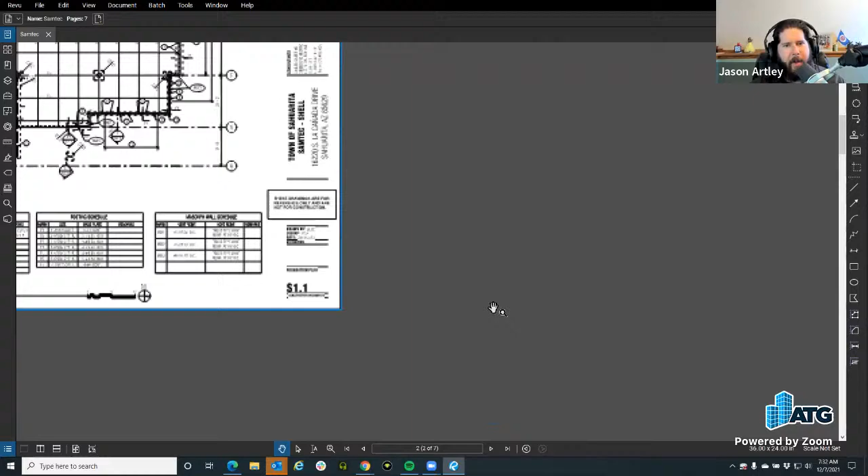But today we brought up stamps because it always comes up. It's one of those topics that you overlook because it seems simple, but it's really not. There's so many different things going on that we can really harness the power of stamps. And I've gone down the YouTube rabbit hole and watched some of those videos out there, and it's like, okay, that's cool, but why? And that's neat, but okay, cool. And then that one, okay, but what else can we do with it? And that's what we're here to explore today.

Yeah, dynamics. There are some that you can add JavaScripting to. So if you're well-versed in JavaScripting, you're going to create form buttons for things, like checkboxes. They have some out of the box that I will throw a link up there soon that we can get access to.

But let's just talk about stamps overall. Most commonly one for some of us folks—my background is structural design and a little architectural design, and Jason's is civil. So for us, maybe something that's approved, and those are out of the box here. So in Revu, under the menu bar at the top, you have tools, and from tools, you then have stamps. Now, stamps can be saved as a markup in the tool chest as well, or you can come to the stamps area over here. Now, my stamps is a larger folder set.

These will always live here, unless if you go down to the bottom, which mine is long, you can go to change stamp folder. So these are all of your stamps that are saved in your stamp folder. They are seen as a .pdf extension. That's how Revu sees them. And I will go through and just place my standard approved one.

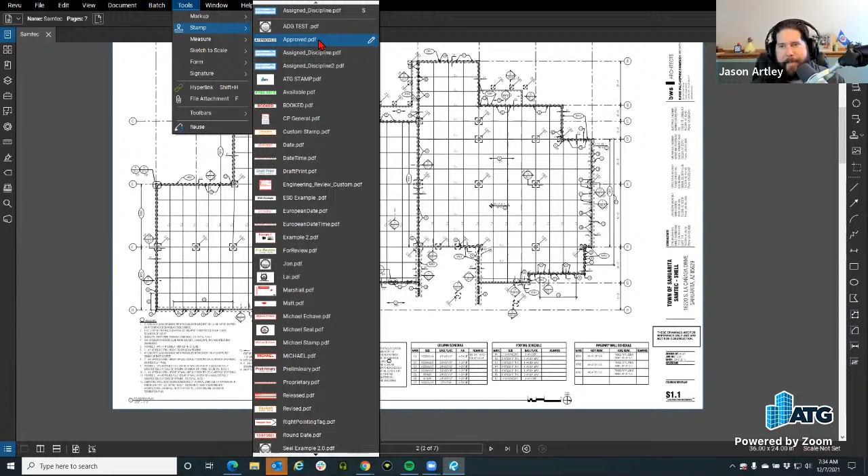And actually, you know what? Probably today we can mess around with the different blend modes so that we can be more well-informed, because myself and I think Jason, we've always asked these questions, what they do in terms of their blend mode when we're going to create them. So when you're getting ready to place a stamp, you can do one of two things.

You can either left click and hold and drag it for the size of the stamp, meaning you're scaling it up to whatever size you want it to be. Or if you just left click and place it—so if I go back to that same stamp, hit approve, left click and just select an area, it's going to place it at its scale that you originally created it at. Now that trick is underutilized, because what happens when you create a stamp, it's going to ask you for the dimensions.

So why would you want to scale it in every time? That single left click is one of the things that I forget all the time, but that's the trick to get it to show up at the proper size to fit on a title block or whatever else you're doing.

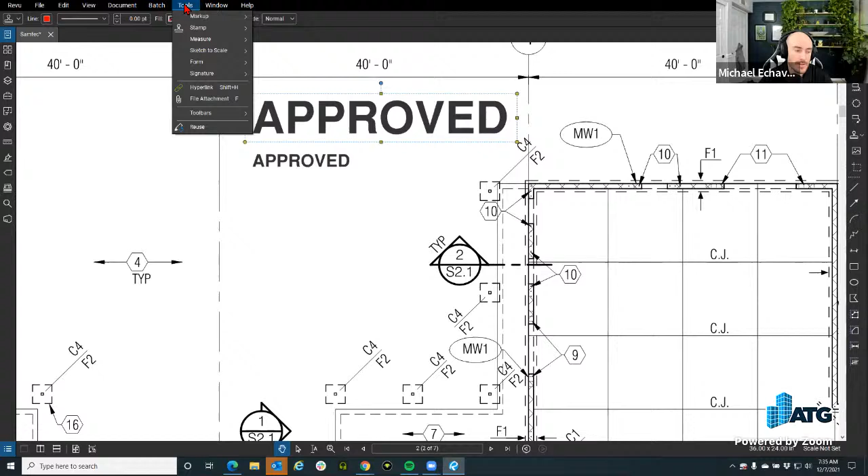The usual workflow for folks that are engineers or architects with a license to seal documents is creating a stamp as your seal with no signature on it. We all know you're required to have a specific size for those stamps, the seal. So if the seal has a specific size, you don't want to have to scale it up — it should be to scale when you're placing it on whatever document you have.

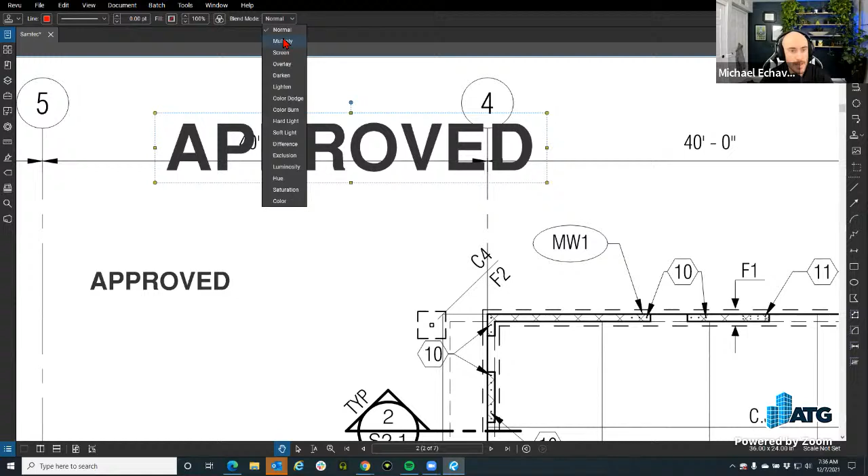Going back to here, when we are adding these, let's talk about the different blend modes. So currently right now, if I place it, it's going to be on top of whatever it's on, right? Now let's check the different ones they have available. These will ring true when we go through and create a custom stamp, because right now we're just checking the differences of the blend mode, so I don't have to recreate however many there are here to see the difference.

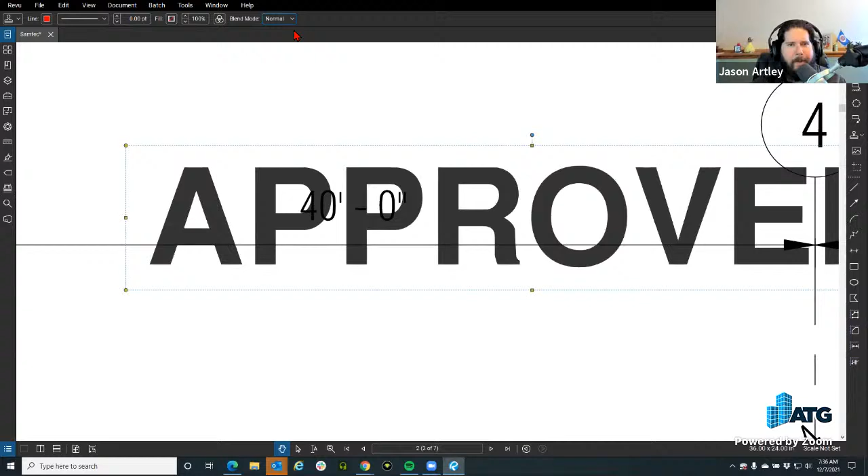So there's multiply — that looks like it's a screen almost, right? It does, but multiply seems like a weird one, let's go back to normal. Maybe we're just going to toggle between normal and... yeah, look at that, it's almost like the screen. Oh no, see, screen gets rid of it. Yeah, oh okay, well maybe that's for...

Oh no, because screen is still light. Yeah, kind of like Matt said in the chat — thanks, Matt. It sent it to the back.

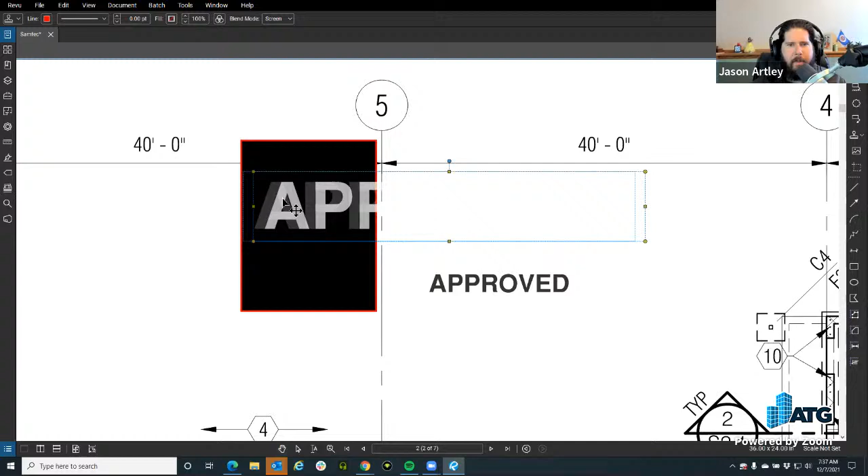So can you bring that forward? So if you go find that one again — hold on. Oh, look at you being sneaky. Yeah, see, even with the black, it is. So bring order, bring to front. Okay, so it does send it to the back, but it also screens it.

Why would it do that? Or why would you want this — that would be the question too. Why would you want it screened? Because that makes a pretty good watermark. So it would be a watermark on your text item for whatever you're placing this onto. Yeah, okay, that would make sense.

What about overlay? What is that doing? It's to the front too.

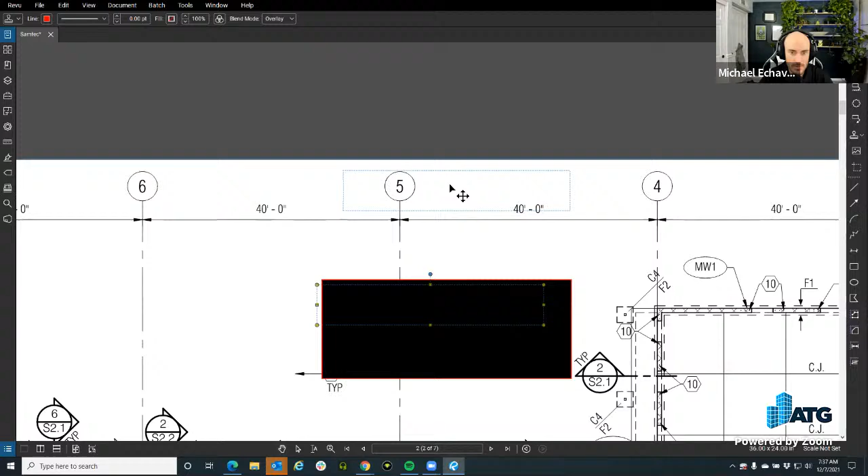Okay, so it is on top of, or it looks like it is. I thought I saw — yeah, you can see it kind of ghosting there. Yeah, see? That's really odd. And that's what's kind of fun about exploring what some of these blend modes mean, because sometimes it's like, oh yeah, just leave it on normal, it's good. But what do all these things mean? And they're not logical, right? As we've seen already. Okay.

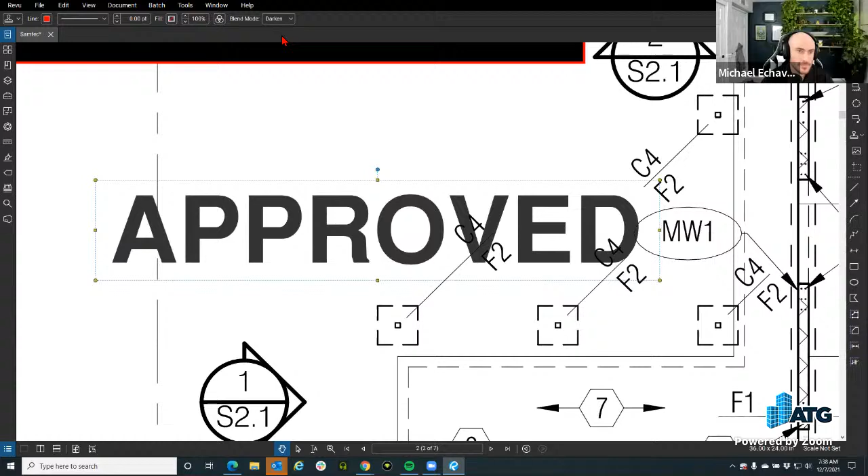Next one is going to be Darken. So still, nope, the text is still shining through from whatever it is. So yeah, but it will not be transparent — it's lighter than it originally was though. Yep, which is interesting, which is opposite than Darken, because I thought it would be. So what does Lighten do?

Okay, maybe it has to do with the screen. Let's place a couple — yeah, try one that's got color to it, like that booked one you've got, because maybe the color has to do with it.

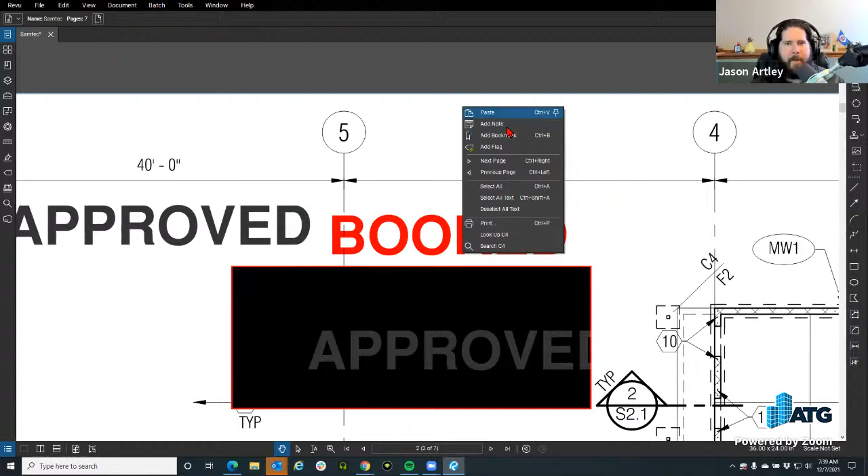There you go, David would like to see — make a copy, so do one normal and then one not normal, or whatever. So this is normal, there we go. And this is Darken. But when this goes on top of something, so normal and normal, right? And we'll just play with these different colors. So this one was Lighten, letting it bleed through. This one was Darken, and then Lighten.

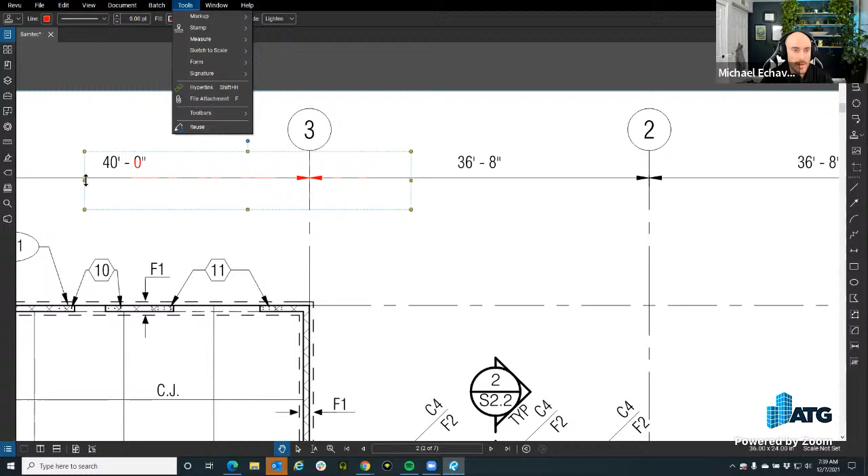Whoa, this is what I was trying to find. So a client sent me this the other day, but it wasn't clickable like that. So ironically, I haven't had time to find the solution out yet. Somebody sent me something where they were able to click around an item and it changed the background color of the line work to a different color. And I haven't been able to find the solution yet, but maybe we have here.

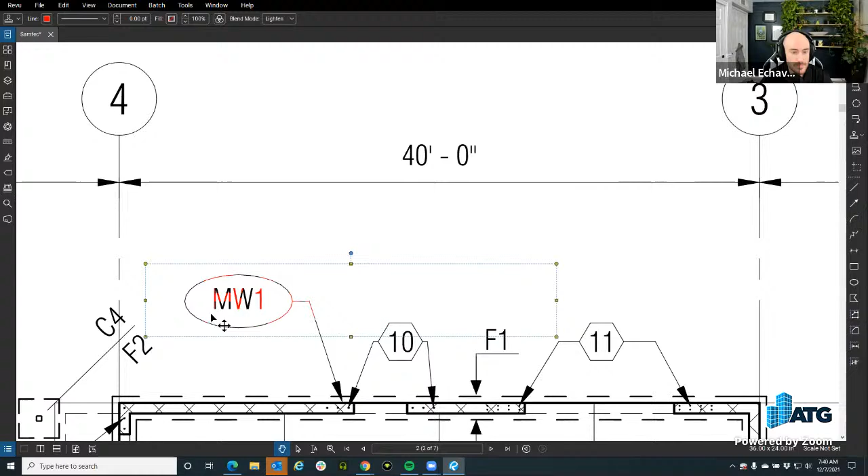So this is the Lighten mode, where it's still having the context, but it's overriding the color of the actual lines in the document. So when you had the black approved stamp, it wasn't quite as visible because it was black.

So interesting, let's go back because Darken — nope. Overlay — nope. Screen — screen does the same.

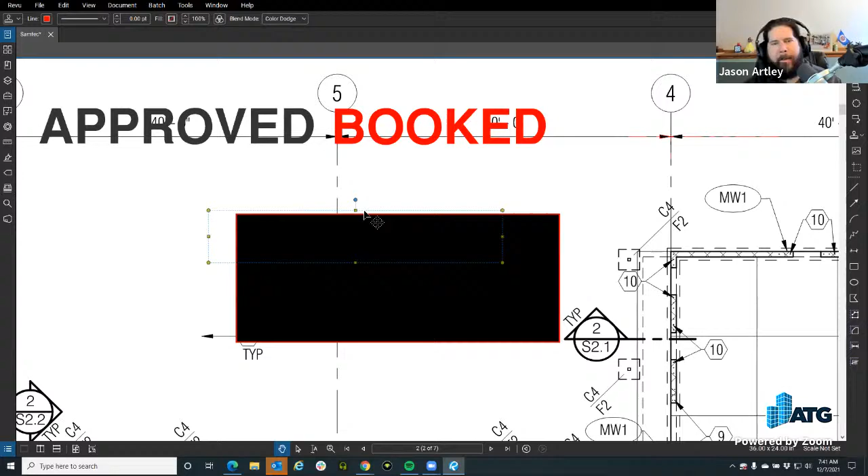Okay, so color dodge. I've owned a couple Dodges, the different colors. Wait, that's a different topic. Okay, cars. Yeah, let's see. So color dodge almost does the same thing, kind of. Not really. Okay, next one, color burn.

Dodge and burn, those are tools I've used in Photoshop, and they're a little bit more apparent. I'm surprised by all these different blend modes. It almost looks like it's sharpening that line too. So let's see. No, okay.

Hard light. So you can't see it over something that's darker. It's almost the same, right, as the original. Yeah, it's pretty hard to tell. So, like, except for this one. Yeah.

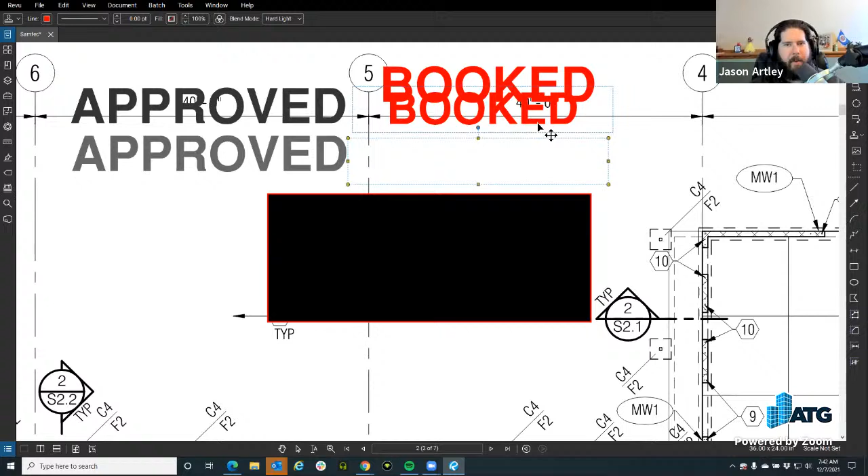I'd be curious if you were to print any of these. Obviously we want to use Revu to avoid paper as much as we can, but I wonder if it would be that visible. Here's soft light. Yeah, hard to tell.

Then again, I'm overdue for an eye exam. So there's a difference, that too. I'm blind, so yeah, difference.

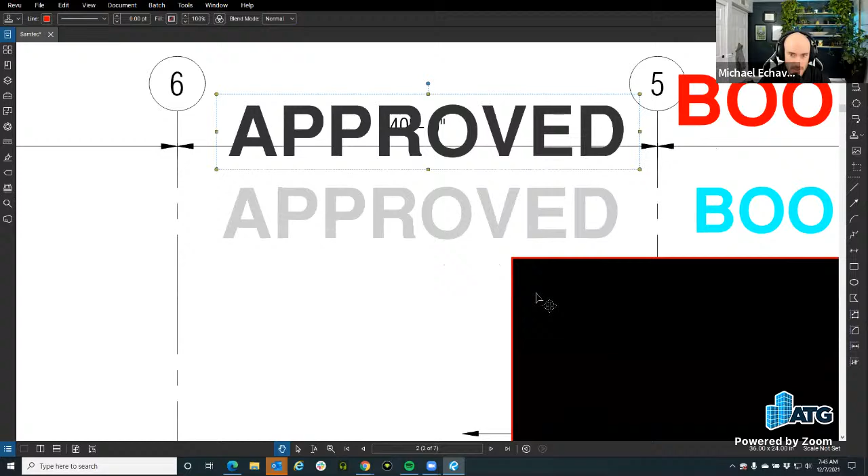Oh, whoa, so it's inverting. Oh, is that what it's doing? So if you take your black approved and do difference, it'll turn it to white. Yeah, it's like because this wasn't black. The black from out, this is black, okay. Right? So it's like it's an RGB value probably. Yeah, okay.

Exclusion, didn't change it. No difference. So, like, there's got to be a reason for it, and it's just kind of silly.

So luminosity here. Changed it to black. Was that because maybe it was normal and then I did that? Nope, still the same. Hue.

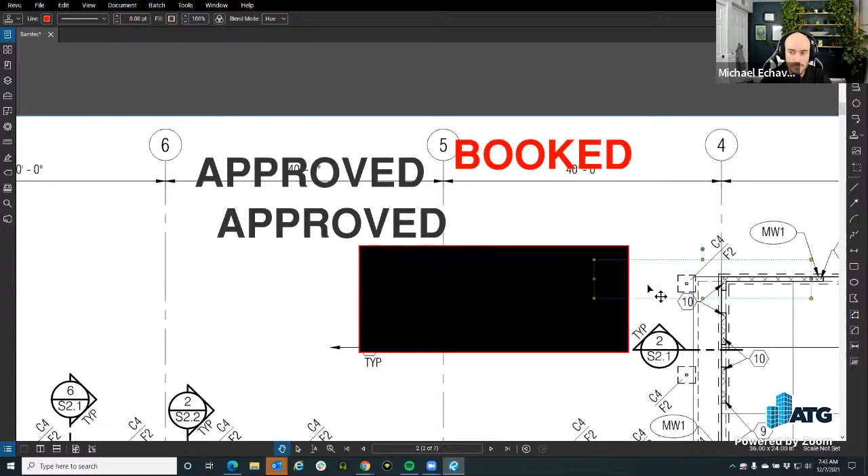You got to be kidding me. I used to know somebody with the last name Huey. Before you were born, there was a band called Huey Lewis and the News. They had a couple good songs.

Saturation is the same thing as that overriding of that line. Oh man, where did I put the other one? Okay, it's right here.

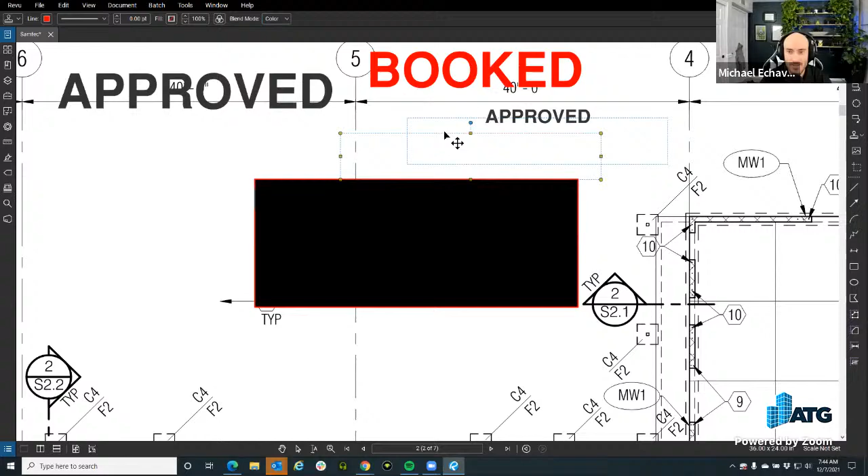And last one, color. I don't see a color. But it's doing the same thing. Oh, yeah, look at that. Oh, not really, but over the other stamps, it is. Yeah, that's really odd. So there's got to be a reason they included all of these things.

All these modes are a bit overkill for a PDF file, honestly. But maybe some of these tricks would have been good for our little turkey showdown, do a little highlight type of thing, but I'm definitely going to be using this.

Do these blend modes only exist in stamps? Have you seen them anywhere else? I don't think I've seen them anywhere else. No, not yet.

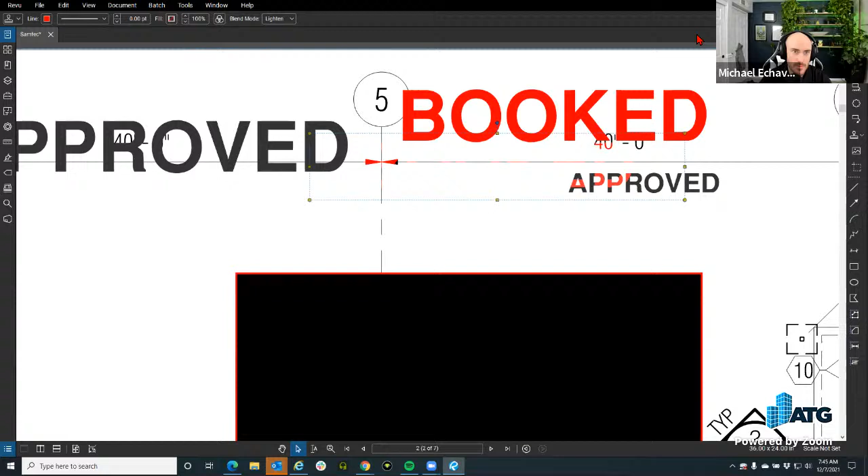So yeah, if we go to stamps and we get ready to create a stamp, if we don't like the ones out of the box, you can always edit any ones you've created before. So if you just click the little pencil here, it will show you the way to edit it. And I accidentally clicked way down there. But be careful with this.

So, couple of reasons. If you change your stamp folder at the bottom, like Michael showed, and it's right there, if you change your stamp folder to a company location, like a server location or anything like that, it will pull up all of the PDF files it finds in that folder and use them as stamps, which is great for making company standards. But if you start using that pencil icon, you're actually changing what's saved on the server, so be careful where you are.

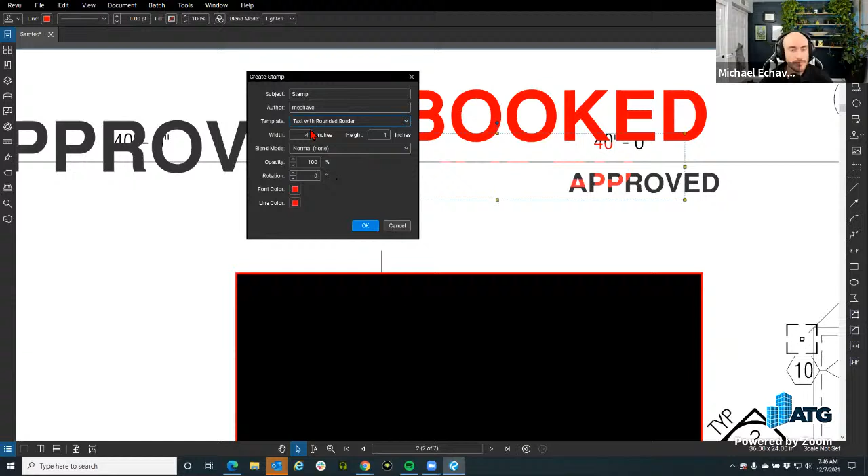You can always change the size if you wanted to. But like Jason was saying earlier, if you don't want to scale it, you just want to left click and place it. What is it going to do and how is that going to work? It'll be the actual size of what that markup is. And we just covered all of these blend modes, and that's why we did it up here.

So I don't have to click it and create all of these different ones and what they're going to be doing for those. What's the opacity of it? Rotation, font color, and our line color. I'm not going to do typical. There we go. So now here's our stamp. We have our round border, like it said, with text. And we selected the black text.

Now, if we want to have any dynamic fields where things are going to auto input some data, you're going to use the text box. And when you get ready to place your text box, you will have dynamic populate underneath. This is where fields will be automatically populated, like user, the day, the hour, the seconds. So once that stamp is placed, all of this will autofill. That dynamic text functionality is only available in a stamp, correct? Correct. Yep. There's no other way to do this.

So if you're looking for one of those ways to include that information. Hold on. There are some headers and footers that have that. That's true. Remember? Yeah. That's true. But what we see normally, like from CAD users, is they've done like a diesel string in to have their file path, for example. Yep. You can do the same thing here with Revu. Yes. But it's a name of the PDF. So just remember that in your extension of file. Without the extension, you just use this one.

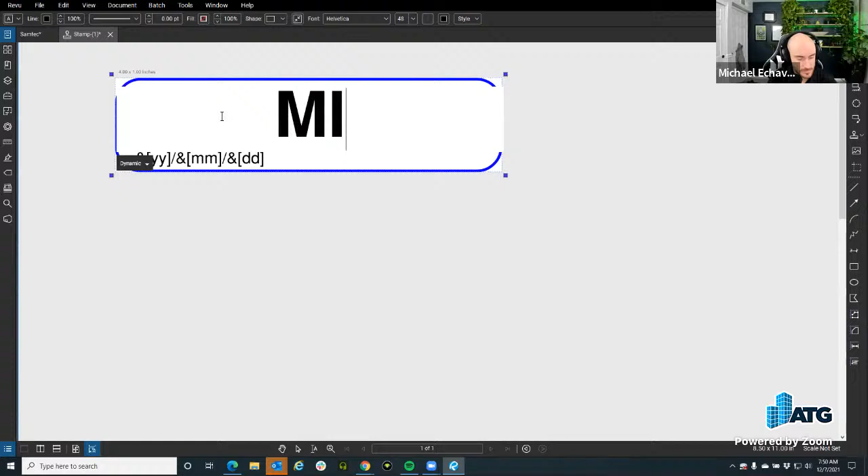So yes. The question is, can you type in that code without having to enter in from dynamic? If you put ampersand, bracket, whatever. I haven't tried it. You could probably try it and it may work. For what those are, because that's just like the JavaScript code that you're going to be utilizing.

What happens when it exceeds the box? It doesn't because, well, I guess it would be for the extension, like your file extension would probably be the only one, because these are set because it's 2 digits as it's shown here. Username or path would probably extend the box. Yeah, it would return. So anything that does exceed past, it returns, usually is what happens. Good question.

And then you can do save as. Ooh, mine's stamp 1 because anyways, so out of the box, you have it stored. Can everybody see this file path here? The program data, Bluebeam Software. For some reason, sometimes you can't see this in a Zoom meeting. But anyways, from here, you can go to C. This is where it's natively saved. So it's under your user ID, documents, Bluebeam Revu. It's C drive, program data, Bluebeam Software, Bluebeam Revu, 20, stamps. So the edition of what it is.

And actually, ironically, I've been getting folks asking questions about 21 lately. When's 21 coming out? So let me rehash that. When is Revu 21 coming out? It's not 2021. So be aware of that. Revu is no longer year locked. They made that announcement in the edition of Revu 20. So it's Revu 21.

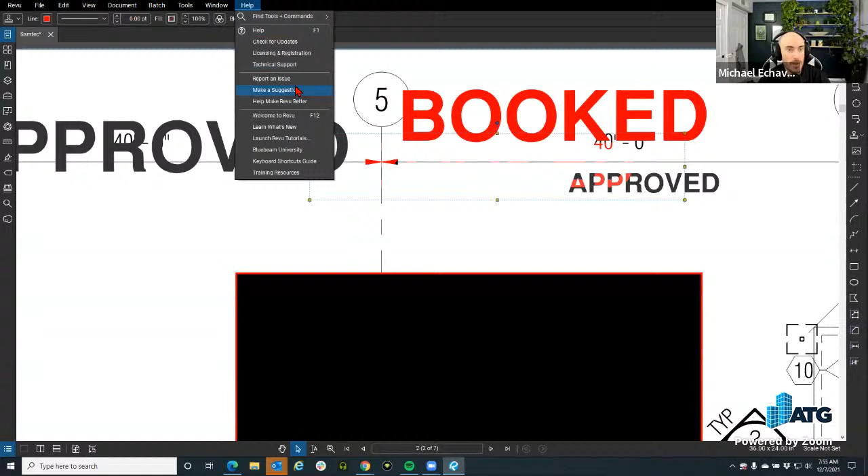I'm just going to hit the exits because now I can go to tools, stamps, and I will be able to, I wish, so maybe that is one of those. If you ever want a wishful thinking item, you can go to help and make a suggestion. My thing here would be, I have so many stamps. Can I just scroll wheel down instead of having to go down and hit this button? I don't know that I have that many stamps that I've ever had to do the scroll wheel. Yeah, I don't have that many. Interesting. I just do a lot of demos and people ask about making custom stamps.

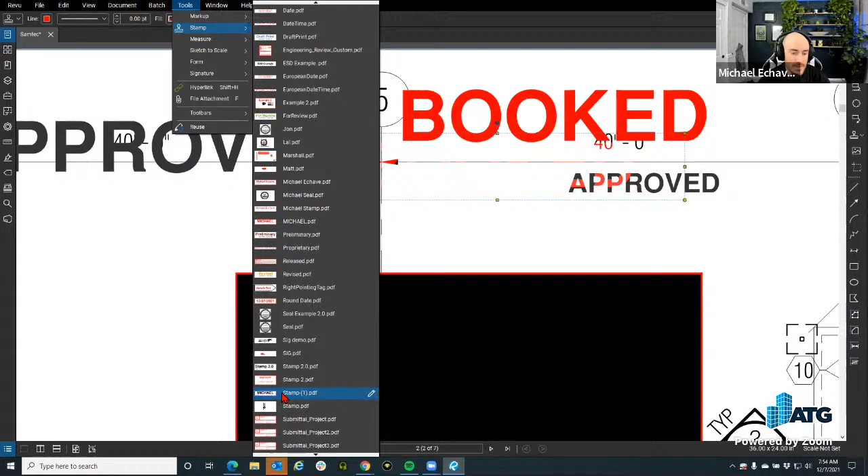So if I go and click this one, and again, like we were talking about earlier, if you just left click, it's the scale of what it was created at. And then there's my date. That 4 inch by 1 inch stamp. And that is pretty cool. I like it. Yes. Or the search at the top, like to search for a different stamp.

Now, one of the things that you did, which is what I always do, which I know is a bad habit, is you created a stamp 1. Yep. You forgot to name it something else. So how would you rename your stamp? Because if you go to the pencil icon, you can't do that. So you might as well show that little trick. Rename your stamp and do it from the pencil icon, you're saying? You can't do it from the pencil icon. So you have a stamp 1. If you wanted to fix that, what do you do? Can you rename it from here? No, you can't.

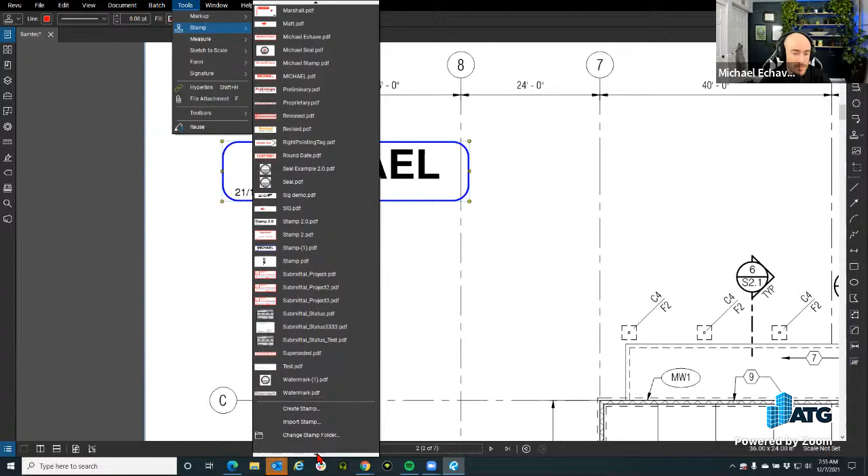You've got to go into the actual stamp folder and rename it. Oh, you're saying the folder. I thought there was a quicker way than the stamp folder. Not that I know of. Oh, okay. If you know, that'd be great. Yeah, because you can't change the name there, can you? Yeah. But that's something I always do. Ooh, document properties. Let's see. Hop up to document properties and see if you can change it there. So that was here. If you're in here, that's just a title, stamp. That's not the file name. Interesting.

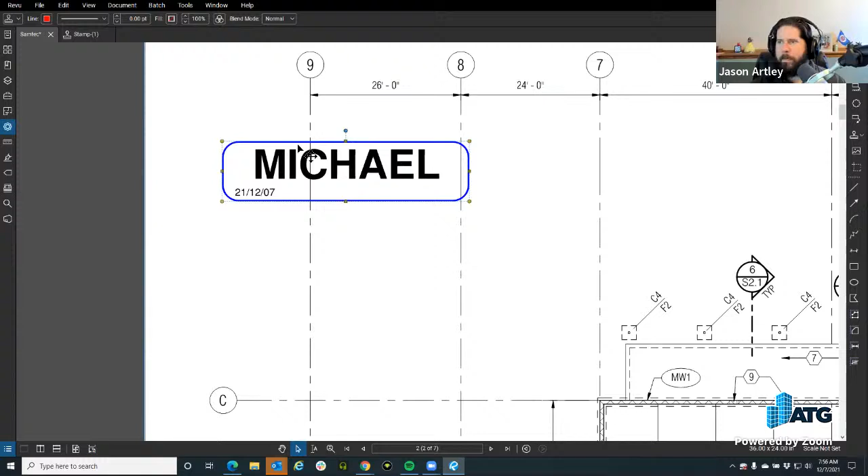What is it? Control P for document properties. Oh, David's saying Control P. So if I select it from here, go back to your stamp one. That's print. Oh, what is it then? It's Control D. Sorry. Control D for document properties. Yeah, there's no way to change the name there. Good suggestion. That's what we do here, though. Let's go down rabbit holes and figure things out. Still stamp, yeah. Okay. So you've got to go into the actual folder and rename it. And then if you rename it, it will show up differently in your stamp dropdown. So going there and changing it is what you would want to do.

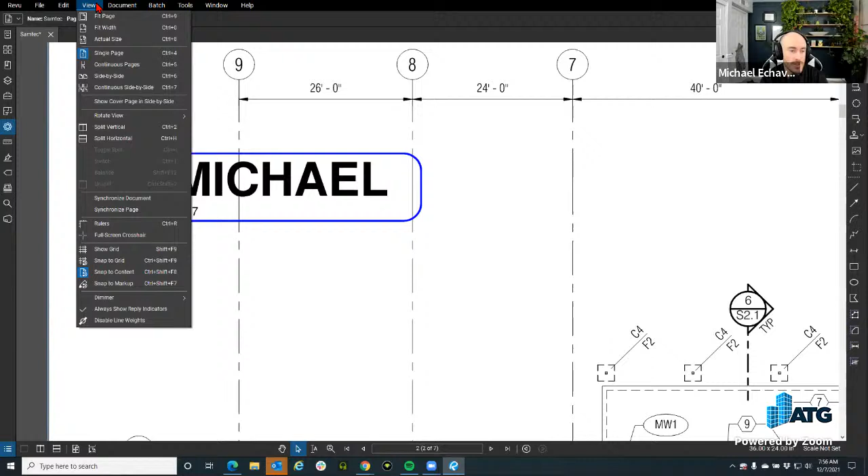Next one is when you place your stamps, you can flatten them individually. So you don't have to flatten your whole document of PDFs. Now, this is just making the markups become one with the PDF, right? And I always recommend whenever I'm sending out PDFs that have revisions that I do want to flatten, having one that does have markup recovery.

So if you flatten them, you can go down to here and you can say allow markup recovery. So it'll allow you to unflatten them. If you uncheck that, there's no way to remove those markups that were made on the PDF. They become one. So my analogy is always like an iron-on branding to a shirt. You're ironing it and making it part of the shirt. And you don't have that chance of washing it and it being removed. But you do if you have this part right here.

Okay. Is that a good analogy? Yeah, that's a good analogy. I was going to say a permanent marker versus a dry erase marker, or pen versus pencil. You can always undo it. If I flatten something and I send it to you, can you unflatten it? Anybody can unflatten? Only if that one is selected, I believe.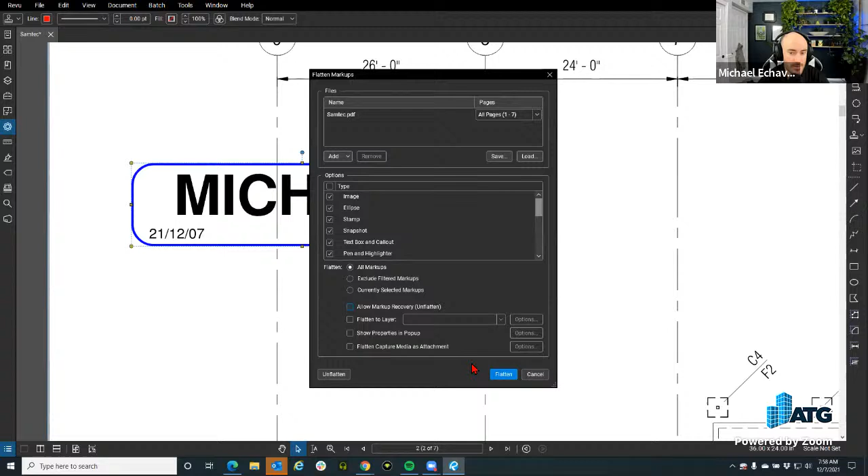Because if I flatten it here, that's not allowing for recovery, right? Right. Is that because the flatten settings are this? But if I were to be the one to unflatten it, is that flattening tied to your username? You can't unflatten it if you have that button deselected. Interesting. See, I can't even come in and unflatten it.

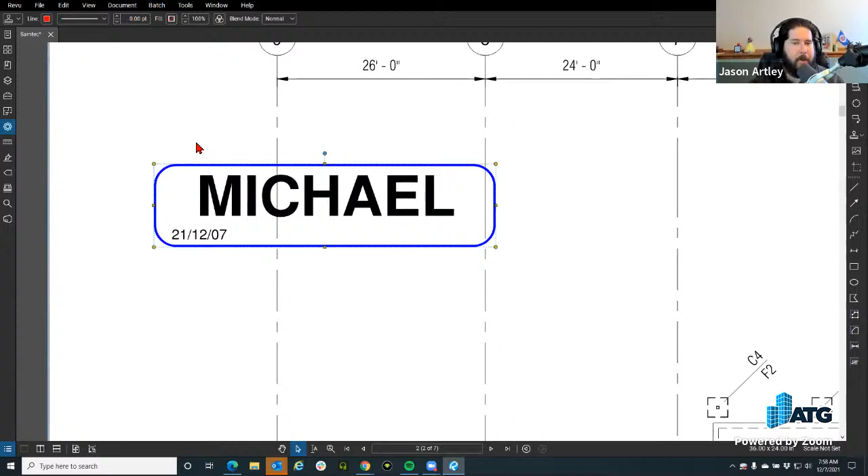So Beth has a question. Control Z. Since we're talking about flattening, can't Control Z. We're kind of flattening, a little deviation from the stamps, but we're testing the stamp here. Beth asks, have you ever had issues after flattening that partially transparent markups, even a stamp where we tried those different blend modes, became opaque and started covering up content?

Yeah. That's because it's becoming part of that encoding of what it was on top of the PDF. Now, we can check if that doesn't happen. Well, let's not use screen. It was multiply, wasn't it? That did the multiply, yeah. Well, let's just do this one. So if I flatten this one,

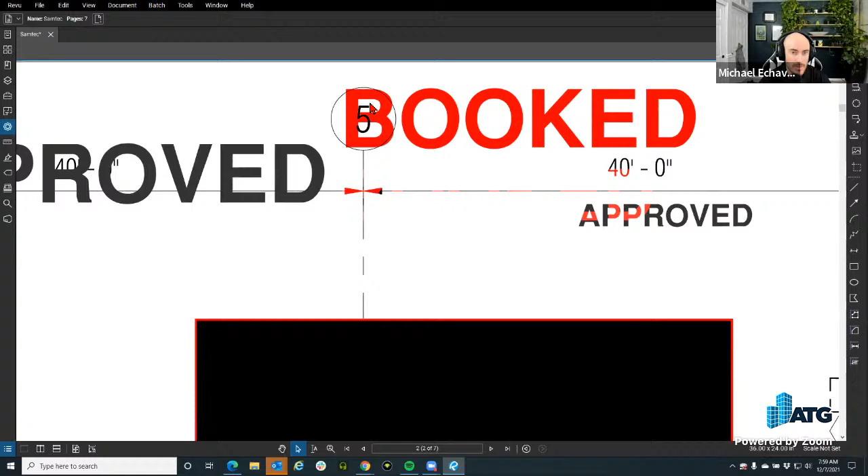so it didn't overwrite. That's also potentially one of those, hey, I made it in Bluebeam and I opened it in Adobe and it works fine here, but it doesn't work fine on other PDF programs. Could be. Well, that's a cool highlight. So let me flatten this. Yeah, it's not. Interesting. So Beth, I think that might be someone opening it up in not Bluebeam Revu, potentially.

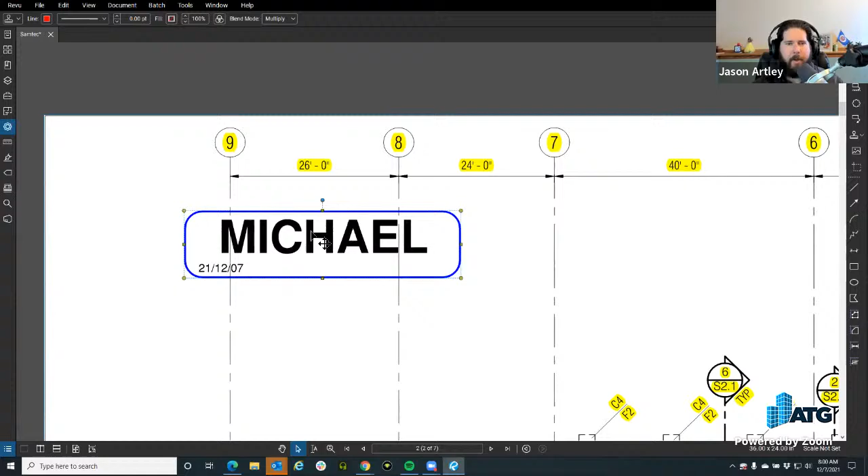Yeah, I would want to see. So we'd have to find out the real issue. Was it their machine? Was it how it was flattened? Remember, Revu follows the ISO standard. So if the other software follows that standard, it should be following that same method.

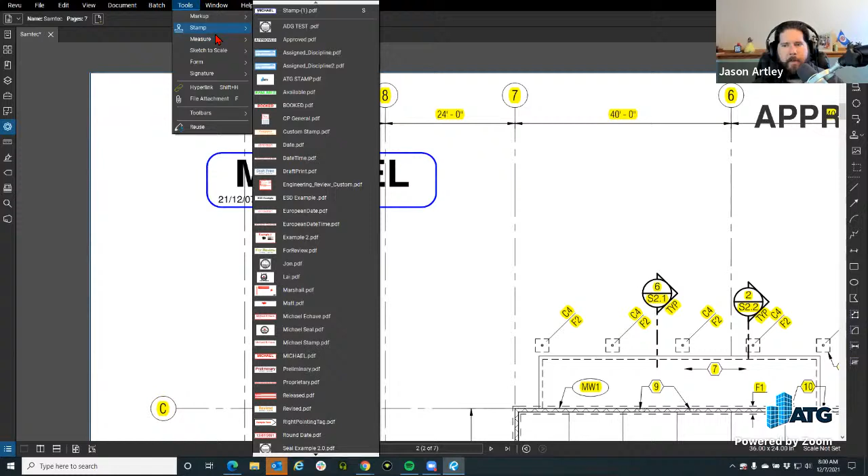And if you flatten an action, it's no longer the little thunderbolt that you click. You can click the actual area for it to move. That's an action, not a hyperlink, because hyperlinks already are like that. Magical. Okay. But going back to here, do you want to send them the extensions?

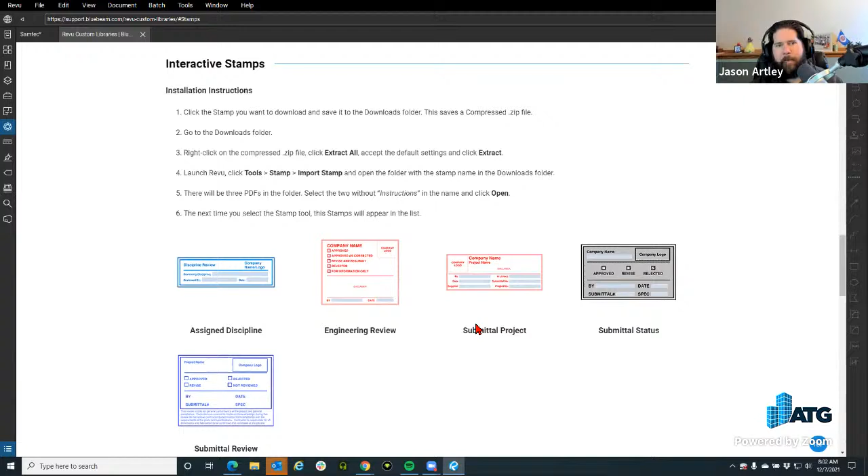Those are cool. So just be aware, I've gone down the rabbit hole trying to modify these. If you do, like I did, you have to have Extreme, because getting into the JavaScripting behind it is Extreme only. So if I go and place one that I've downloaded, like this assigned discipline here, if I click this, it's going to give you a JavaScripting window.

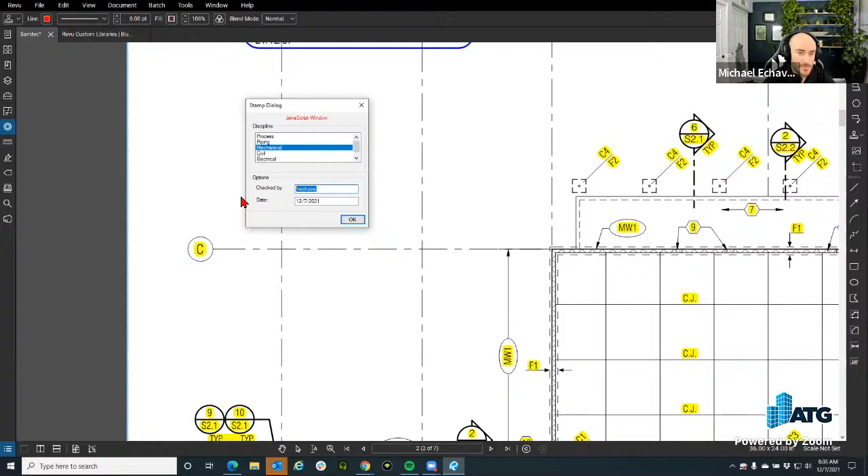Now, this is the part where it's dynamic, where you get to select different items and then it populates it in the stamp. So if I went in here and said mechanical, checked by, the date, hit OK, that data fills into the stamp location here. Now you can go in and modify your company name and logo here.

The harder part, and where I've always failed, is the renaming of these, right? Because this is tied to what's filling in the data here. So let me break that down and what that means. If I go in and edit the stamp, I'm going to see these fields, and these fields are being assigned under my forms. So if I click forms here, I'm going to see this.

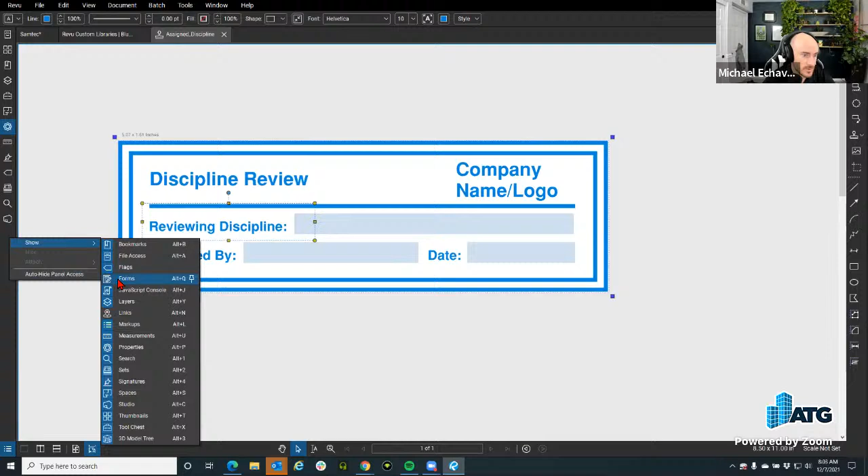This is named by this location here, and it's being filled out by that JavaScript window. So these are just form fields, and under tools, forms, JavaScript, this is the JavaScripting window that's controlling those. Yes parameters, no parameters of your selection of the specific script that's selecting the form field of the data. So if you look at your list group discipline here, this is talking through your list items in your list box, and what those items of selection are.

So you have your yes, no parameters for process, which is the one automatically selected first, -1 for just being a selection, piping, mechanical, civil, electrical, instruments. So these are your options here. And I've tried modifying and changing some of these, and it hasn't really worked that well.

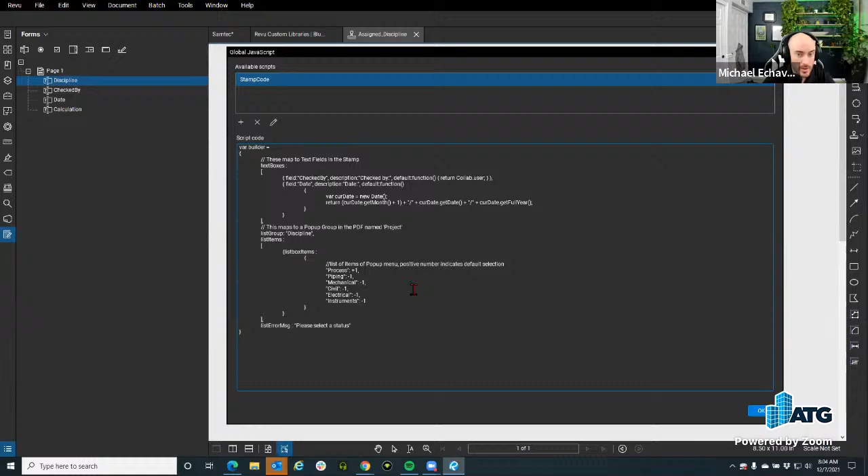What you can do is change this text, right? So your logo can be in here, and you need to get out of the forms because it's just going to want you to select forms, but you can come in here and change your logo. You can add a different color. Changing the name of where the form is being instructed to change by the JavaScripting data is a little bit more complex. So just be aware of that. It can be tricky, but that company name and logo is just begging for you to edit it, right? Yeah. So do what you can there.

David has a great question. As usual. Thanks, David.

So this goes back to that dynamic thing you put in there for the date. Is that date sticky from the time it was applied or from the time the PDF was opened? So if you place this stamp and there's that date box, I believe it goes by the time it was applied, and it will not be dynamic. It doesn't update on opening. No, I don't believe it does. I believe it's when it's selected, because that's when it's pulling the data.

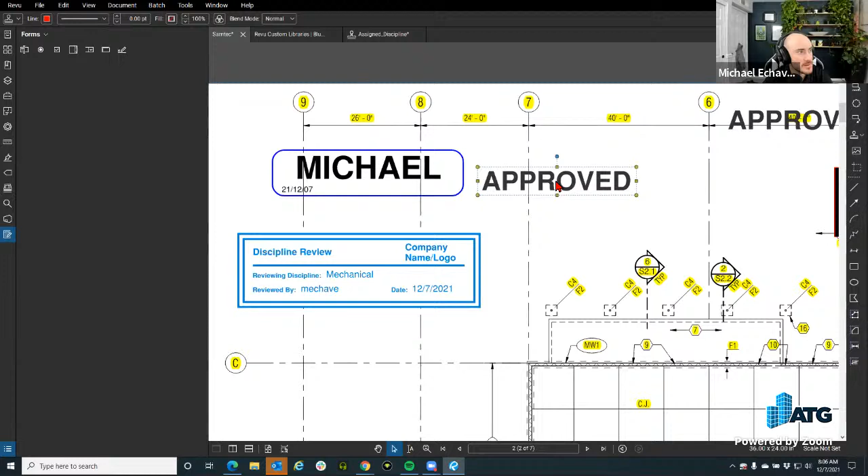So when it is selected, meaning placed, not actually clicked on. Yeah. When it is placed like that, that's when it's pulling the date. Can you go back and edit your Michael stamp there and hit that pencil icon?

Our buddy Matt Lynn has a question. Did the dynamic input have both options for date? You put in year, month, date. Is there an option for the 4-digit year? There sure is. So let's go to minutes and seconds, and this will determine. There you go.

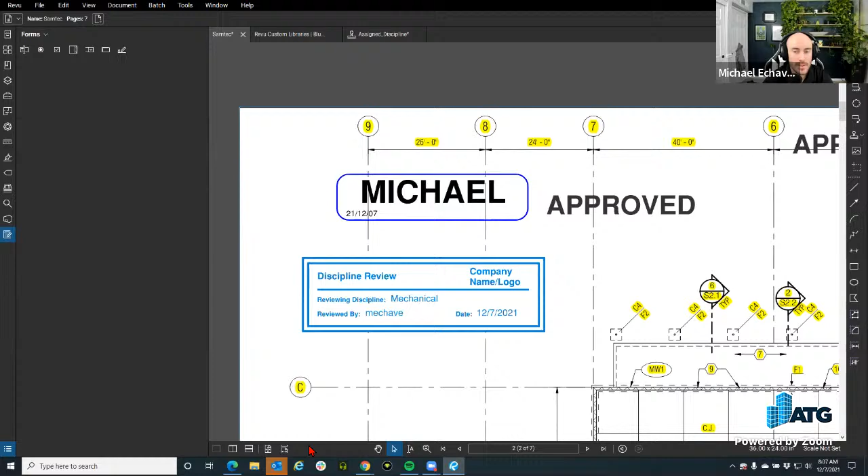So is it from the minutes and seconds when I'm going to select it? Once this hits 30, I will place it. So is it at the 30, or is it after that? Is it when I click it from the box here? If it's not closer to 30, I'm going to wait a couple more seconds before I place it. And if it's past that 30 marker, then it's when I click it to place it.

Let's see what you got going on here. 43. So yeah, as soon as it's placed is when it's locking in that time. Now, I was messing around with these stamps a couple weeks ago, and the hour is military time, the 24-hour format. I haven't found a way to do a 12-hour AM PM.

Ooh, like the convenience store? I haven't seen one of those in a long time. So that's a down south thing, I think.

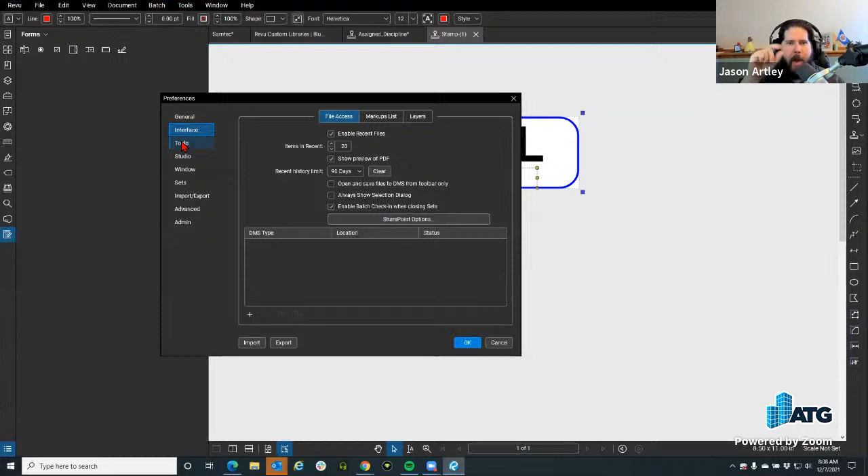I wonder if the reason for that is that it's multi. Oh, it could be. Well, because language US, because I know we use more AM PM here than some of the Euro countries. Interesting. There's so many settings in here.

Oh, while you're in here, can you pop over to the General tab and go to your username? So earlier when Michael was creating those stamps and they had the user, you can change that to anything you want. So I normally put my full name, Jason Artley, and then I put ATG in parentheses. So if I am collaborating with somebody, they know who this guy Jason is, right? So if you change that username and you have a stamp that has a dynamic field looking for username, it will put in whatever's there.

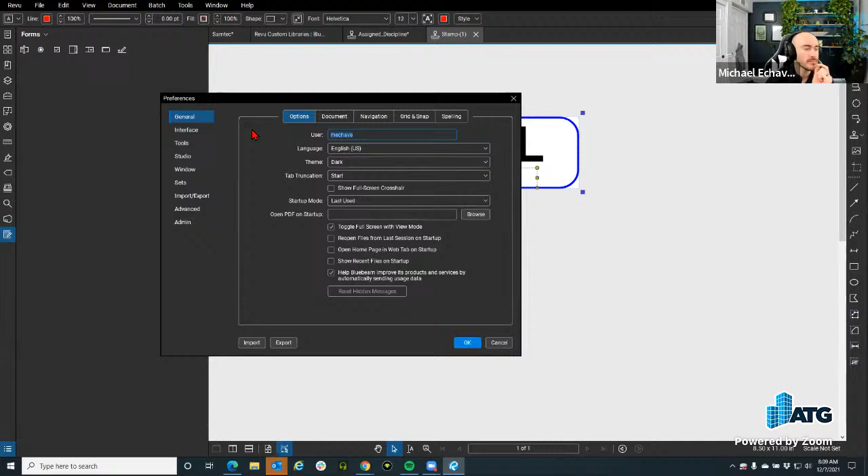And that was a good thing, Chris, saying that mine's not on military time. So maybe it is pulling from some kind of Windows setting that is military driven, just like the date and time. I'll have to drill into that and figure out where it's pulling that. Maybe that's a JavaScript thing. Yeah. Because that was minutes and seconds and it was doing 07. And I'm guessing it doesn't go to like 12 because it's not showing a PM, right? Right. Okay.

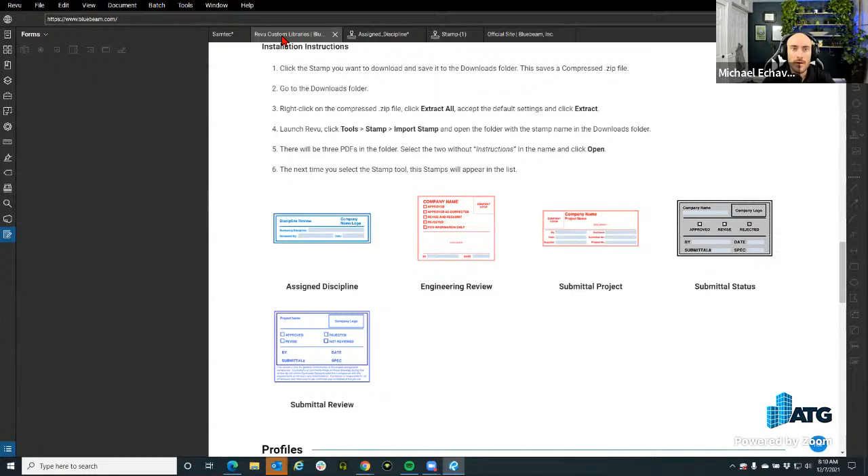But going back to our assigned discipline, so you have these, and this one was also from that location here. The tab here. Oh, it's right here. So that's this one right here. And they have other ones like company logo for your submittal review, your engineering review, company logo here. It's asking for some additional information that you can go in and play. So again, like Jason was saying, they are asking you to change some of that stuff so it can be more centric around your firm.

The check boxes are really cool. Mhm. On that engineering review one, or even a submittal review. Yeah. JavaScript pops up and asks you to check the box. And that one I have right here. And those are just checks as well. So you can create check boxes for these. And that's all this is.

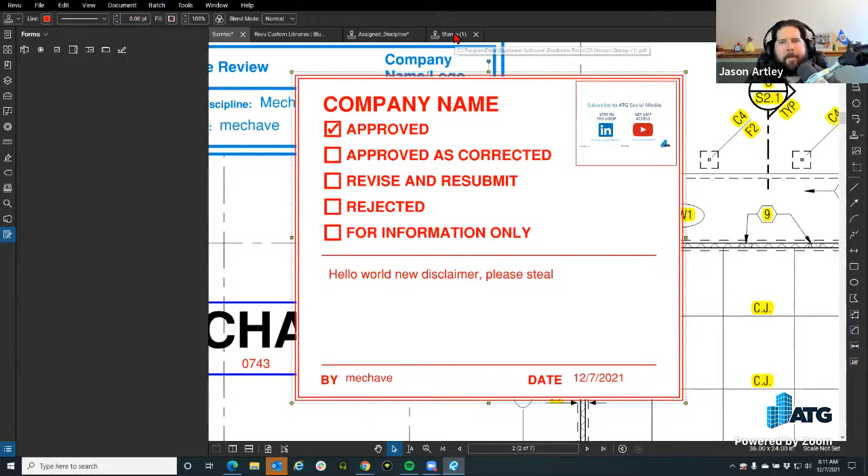Oh, look at that with the hello world new disclaimer. Please steal. So clever. David's got a question. Can you go back and show you where you added that dynamic text? Yeah, so it's any text that you selected, when you double click into it or you place a new text, you have dynamic here. So you've got all those little options there. There's some good stuff. I really like the 3-letter abbreviation for month. Mm-hmm.

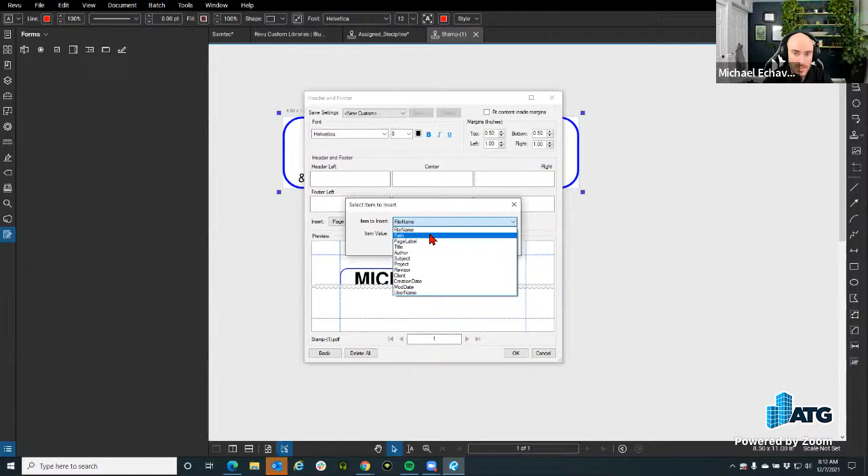And this is, we were talking about it earlier. So if I go to headers and footers, you have headers and footers in a stamp file? Well, no. Okay. Well, yeah, I mean, I'm in a stamp, but it's showing it for my document one. Oh, it is doing the stamp one here. But this also has the file name, path, the same kind of thing, but a little bit more like subject, project, revisor, right? So you have all of these additional ones, but that's what that one question was that you were saying earlier, is there anywhere else that has something similar?

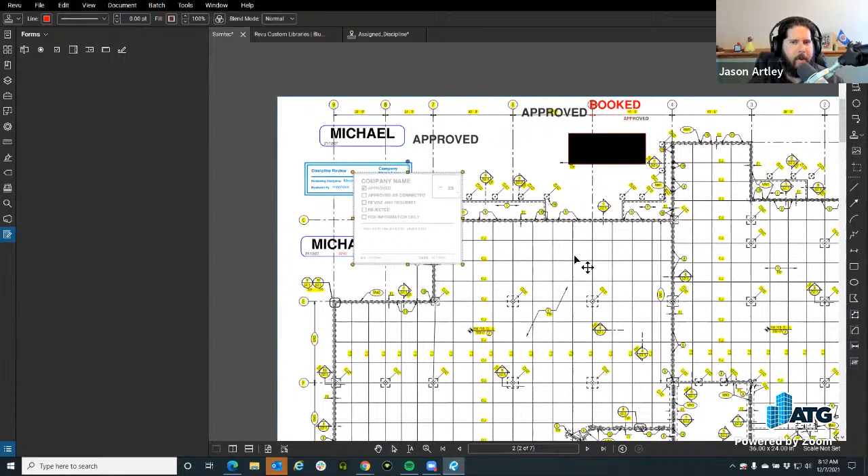There are something similar here, like file name, right? And then it'll give it that at the top, which, I don't even know if it's going to fit in there. So, but this is also the additional one that you have for those items. Also kind of weird that it shows up in a different code, right? Because it was showing in the caret brackets. Yeah. Is that what you call them? The greater than, less than brackets, instead of the ampersand blocky brackets. Mm-hmm. How's that for a technical term? That was great. You were right with all of it. I was going to say a different one, but it's a completely different type for coding. But great. Those are what we have available.

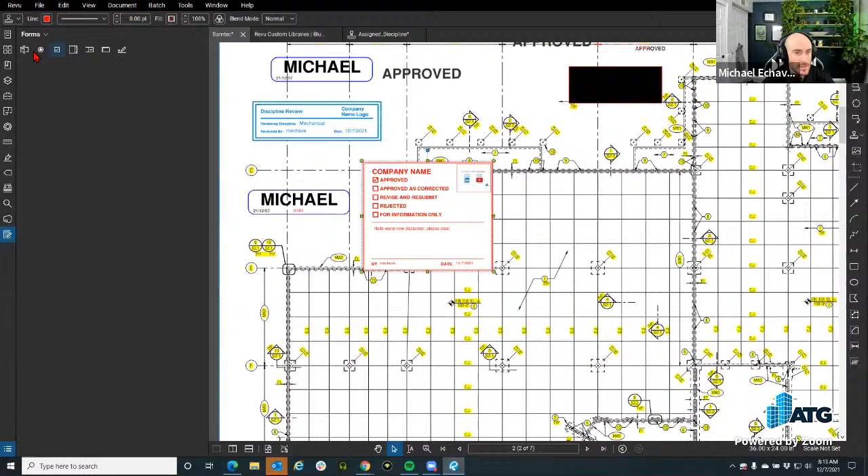Yes, I highlighted everything. And those checkboxes are the same thing in here. So if I go to my stamp, I edit it. They're right here. So you have a status, which then gives those selections of what it's going to do for all of these checkboxes here. So it's a form that's applying the checkbox, and then it's a JavaScript that's applying the pop-up that asks you to do what it's going to do. Yep, exactly.

So these point to this, and these are selected once the window populates. I believe it's the error message because this is saying select a status for me since there's nothing selected. That's why it's popping up, but I'm no Java expert yet.

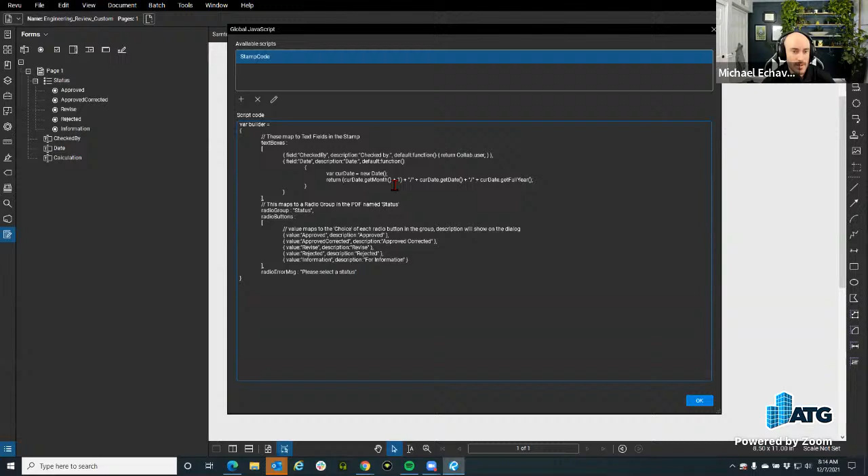So this is a good question from David. A few months ago we did an episode on forms, and part of that question, it might have been you David, they asked can we harvest that data after it's been assigned. Same thing - if we had a stamp that had a form in it, or a checkbox, is there a way to harvest that data so we would know, hey, but nothing's inserted?

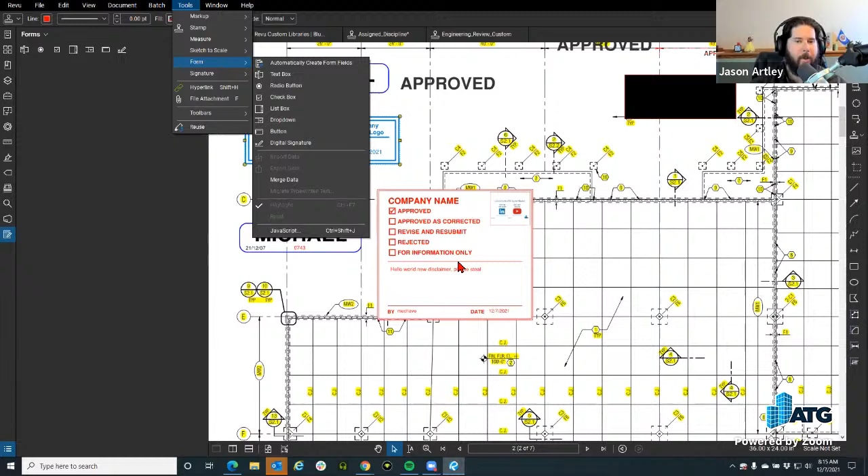What if you go check that box, though? These are inserted - oh, that is a checkbox. I believe it's probably because these are their own PDFs, stacked on top, so there is no data that's entered in here, only in here. It looks like you cannot harvest the data that's entered into a stamp. Good question - that you can from a native form.

So like from here, and we went through that on one of our morning coffee reviews as well - if I type something in here, I can get the data from here as well. Export that data, get it going.

And there's another file format. You don't have to do FDF, it can be CSV. Or XML. Someone asked a question, what's the difference between CSV or XML? It's the file format - all three are different. CSV for Excel, FDF I don't know, and XML can open in a whole bunch of things.

David was trying to think how we could use physical stamps on paper copies in our invoice approval process, and then how could we take that to Revu. You'd probably just want to use straight up forms for that and not a stamp with a form.

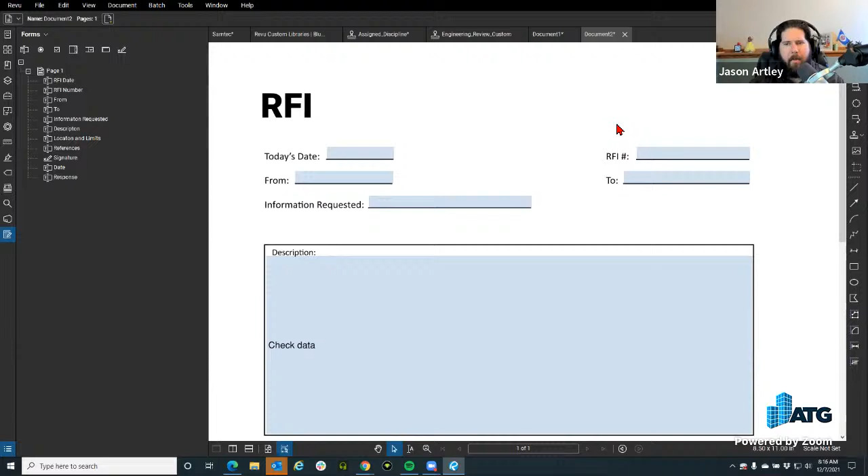If you're trying to just get the data entry, otherwise you can just create a custom stamp in here. So you could also do the stamp where you're grabbing it from - if you did a physical stamp, you could scan it in and still create a stamp with a cutout. So you can do a snapshot - go through and grab this snapshot of the content and then place that in your stamp. So if you're trying to have something that's exactly the same, you could do that as well.

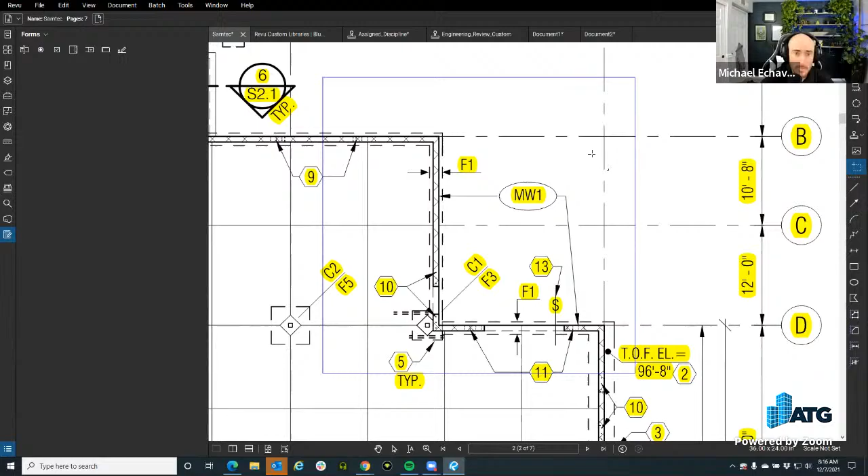But back into signing and sealing. So if I want to place a seal here, to each their own, right? You can go through and place your seal. I messed up these seals, but this is their seal, and you would never do this - this size is just not correct for this one. I'm going to scale it down, but you would never do that because it would be the correct size when you're placing it, right?

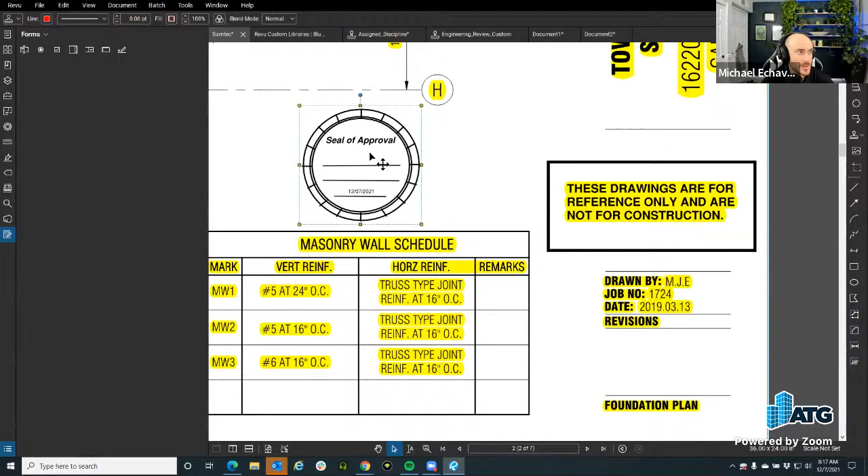Jason? There's legal implications for that. Yeah, so from here you would never do that - I'm just doing it so it fits in this location. So from here you can do one of two things - you can then flatten this and it becomes part of the document, right? But the thing is, that's fine because the seal...

What really matters also is my signature, right? So I always suggest having your seal as a stamp. Now this is where it comes to you to decide how you want to sign it. You can create an additional stamp that is just your signature. So if I go down and look for my signature - you can all yell at me for my weird signature - there we go, right, there's my signature, and then I could flatten this.

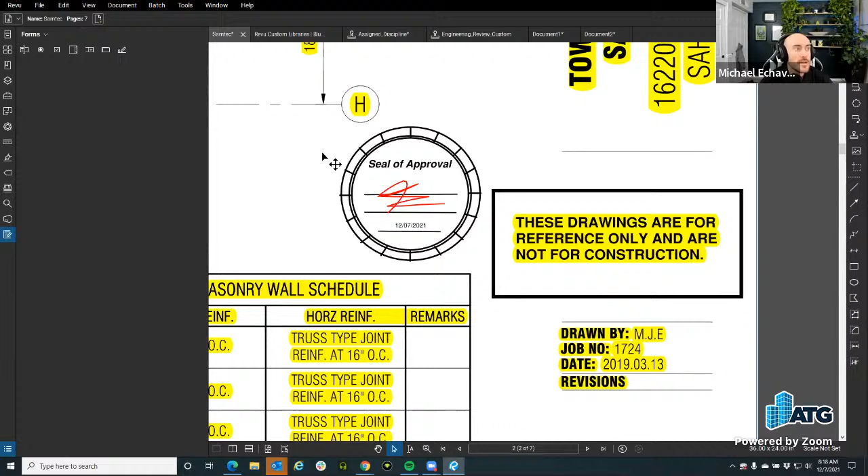Again, to each their own, it's how you want to do this. Just be aware that people can come and get snapshots, remove it. They could do that, but again, people could do that with any document as long as they allow it to be editable. And you can set up security - we did a whole item on security - or you can use this batch sign and seal, which is an extreme version only.

The secondary option is creating a signature location with the signature on it. You come in here and do this—this is where my signature is going to be placed. So when I'm getting ready to be done, I can click this, log in, and have my own custom signature here, so that it's password protected, can't be snapshotted, can't be copied.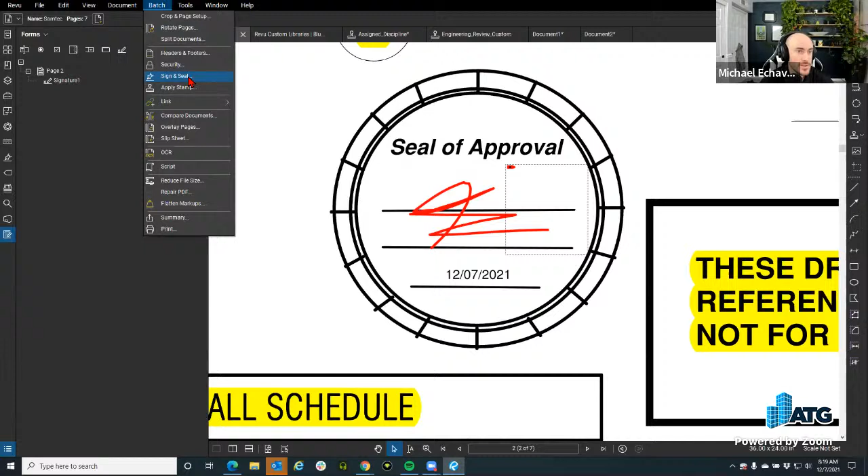Or this is kind of the same thing when you're going to the batch sign and seal—this is an extreme version only feature. You can come in here and say yes. Oh man, I just did it again—so don't just say yes, because I overwrote that document since it asked me to sign it. Please read the instructions as it goes along. I'm going to hit next.

Glad I'm not the only one. I always remember to do it, and sometimes I don't. And now I'm going to have to go back and remember that I have this, as it's going to create an encoding item behind it, so now I have to redo all my things.

But back into here—this is my signature, the digital signature part we saw earlier when I was doing the single sign. But this is going to do it for all pages. I can scroll over to here and apply my signature, then go down and select my custom signature, whichever one I want to use. There it is.

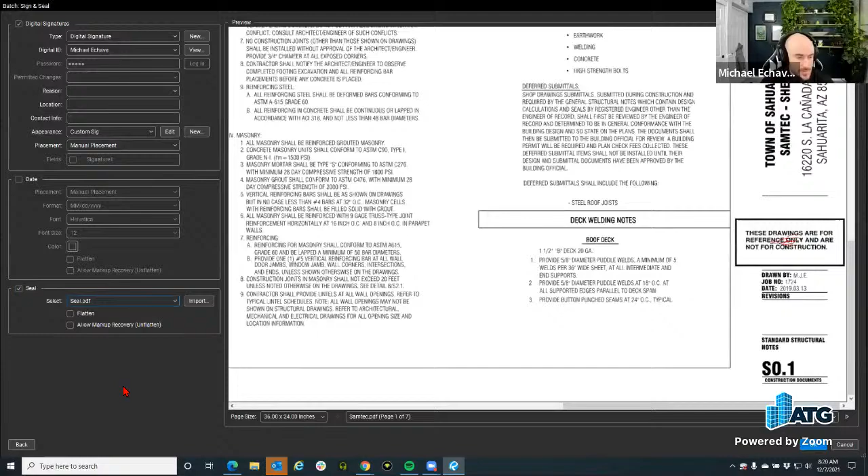But I also need the seal, so you have the seal down here. You can select the seal—these are just your PDFs, stamps, PDFs, stamps—and this will be up here as well. I can bring this down, and you can also rescale it in here if you needed to, which we would never do because it should be to scale, but I'm just giving you an example. And there we go, right here.

As I'm going through and doing this, as you noticed here, this was done earlier because this was not for being drawn on. So I'll place these over here so you can just see it. This will go through and do this for all the desired pages that you want. So when you're getting ready to hit done, it'll ask page what, or did you want all of them—you can go through and do all of them or specific ones.

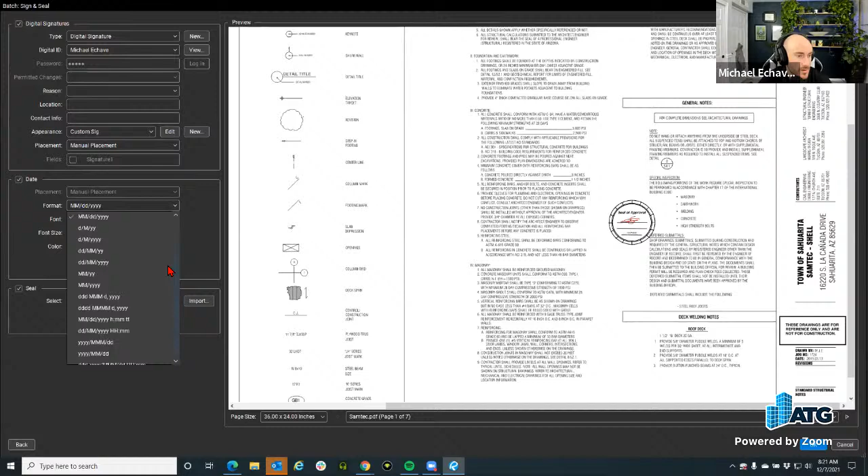You also have this date feature. If you wanted to place a date, you have your date formats here, which is way more than what we had before. You just have to go up here and select where you want the date to be placed later on, like down here—now you can't rotate it though, which is unfortunate. That's where your seal already had that dynamic date placed in there; you might want to not put that in your thing.

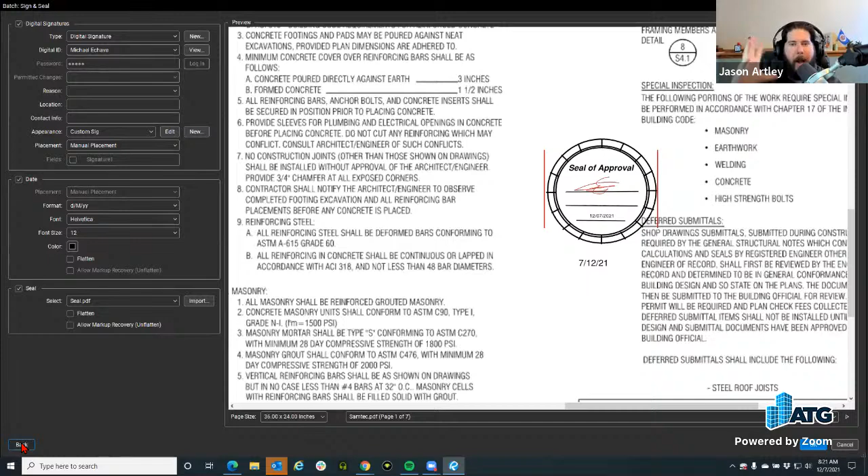Matt's got a question—backing up before you started doing the batch sign and seal, which combines both of those features: would it make sense to make a stamp that already had your seal and your signature in it at the same time?

That's up to you and your security, how you feel about having that—that's when it comes down to that decision. Are you comfortable having your signature and seal just saved on the network where anyone can get access to it? If it doesn't matter to you, and you don't care if someone comes and does a snapshot of all of that, then yeah, that's going to be the easiest, quickest way. So that is your decision to make.

Also, looking at the stamp you've got there, that blend mode could come in handy, because it might be able to look more like a pen on paper if you had that set to multiply, where it was a little bit see-through. Maybe that's a trick to why some of those blend modes exist—to make it easier to replicate the actual wet stamp, wet signature look.

So there are a couple ways, a couple processes you can go about it. If you have Extreme, which I always highly recommend, the batch sign and seal will stamp and sign the same area on every single document. So hopefully your title blocks are in the same location, because it's going to go in the same spot on every page. Or if you don't have eXtreme, you can do a signature box and do the same thing.

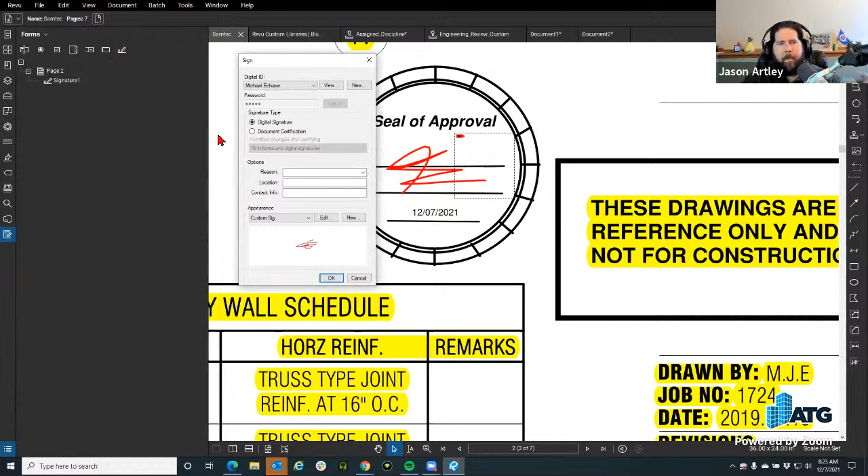Digital ID follows a different protocol, right? Isn't it some sort of Microsoft protocol there? Yeah, and document certify, either one—you have both of them at your disposal.

Can you show how to create a signature box again for non-Extreme users? So you don't need Extreme to make a digital signature. You just need Extreme to do the sign and seal on multiple files and pages at once.

Be aware of this: if you create a box, you can't delete it unless you have Extreme, which we found out—you don't get forms unless you have Extreme. So I can't come in here and delete it after I've made it if I made it in the wrong spot. Just be wary.

But you can come into here under Tools, Signature, and you have Sign. So you can create a signature box—I just left click and hold to drag the area of selection to place my signature. And now that is always there. I can come in and certify it as my sign. Just be careful with that one.

If you don't have eXtreme, you won't be able to get rid of that box once you place it. You can move it—no, you can't. You're stuck. That's why I always recommend one version of Extreme.

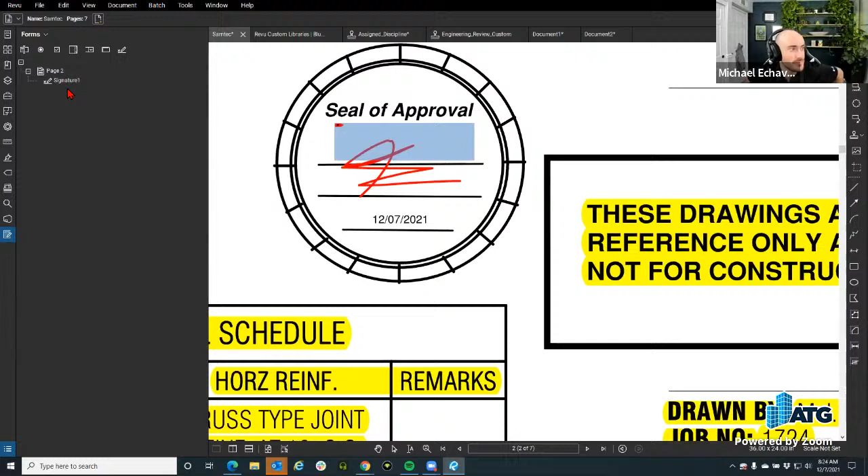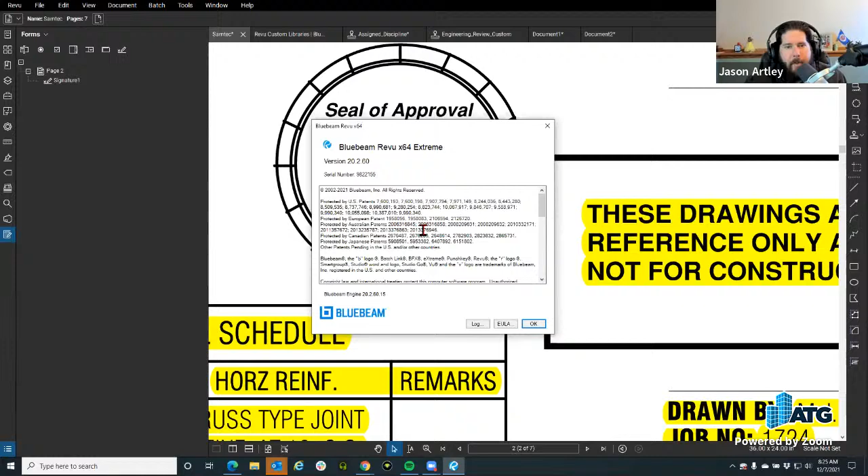Ooh, here's a good question. Thanks, Lee. How do you figure out which version of Revu that you have? Top left, under Revu, About, and it's telling you your edition—it'll say Standard, CAD, or Extreme. And then there's also the version, which will show you if you're on the latest version. 20.2.60.

Very cool. So let's show another trick. If you wanted to apply a stamp to all the pages at the same time in the same location, but you didn't have Extreme, what would you do? So you can do that. By the way, they added new additional ones—I forget which update it was, I think it was 19.

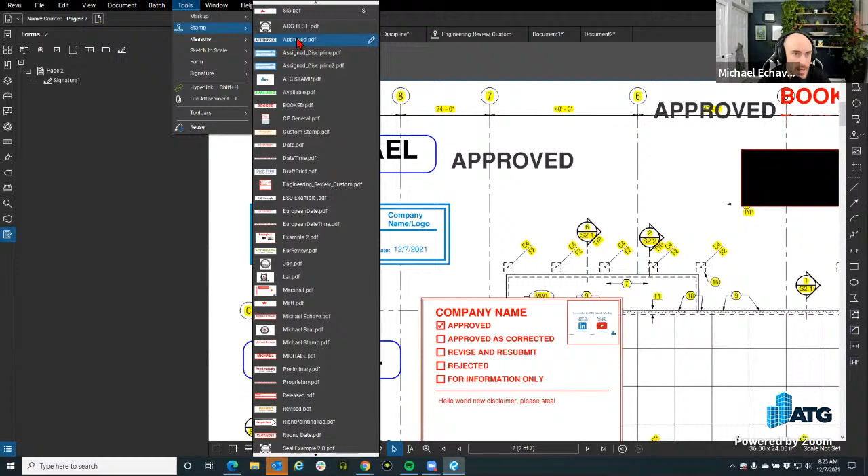When you go in and place a stamp, we'll just grab one that's right here, like Booked. Oops, that one's flattened. So if you want this approved on all pages, you can put a little rotation on there—look at you—and maybe a little more. There we go, it's approved so much you can't even see what the plans are. I love it. So these plan sets are approved, and I want it on all pages.

I can select the approved stamp, right click, and you have 'apply to pages.' So a little hidden trick: if you're trying to stamp multiple pages at one time and you don't have eXtreme, this is a trick to do it.

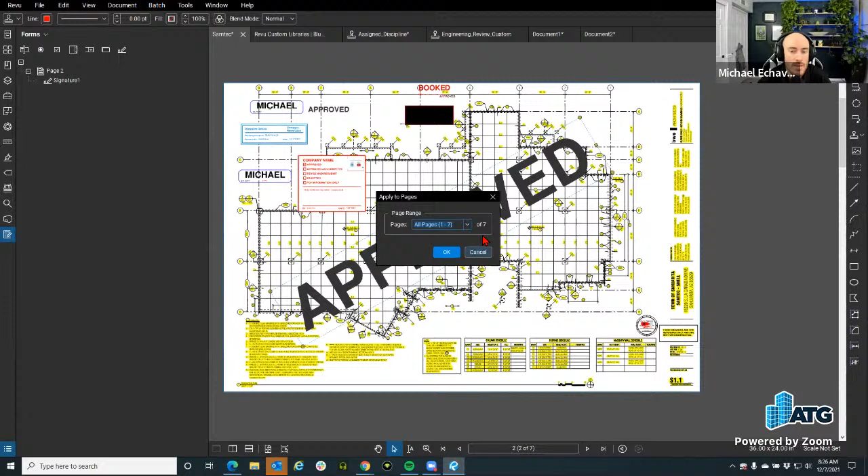And they updated this—it used to only be like custom and all, now you can do even, odds, landscape, portrait. The only thing is when you hit OK, it doesn't show you that it did it—you just have to know that it did it. So if you had the thumbnails open, you could see it.

Oh, see, that's a good trick. I would have just started flipping through pages, but you were thinking ahead and went to thumbnails. I like it. And you can apply a stamp from here too—under thumbnails, you can apply a stamp as well.

And if you choose that, does it go to all pages? So this is just going to do all pages. Yeah, and you get to pick which one you want. So it's another way to apply. But it's only in a quadrant—so your quadrant is where it's going to be. It is a little tricky.

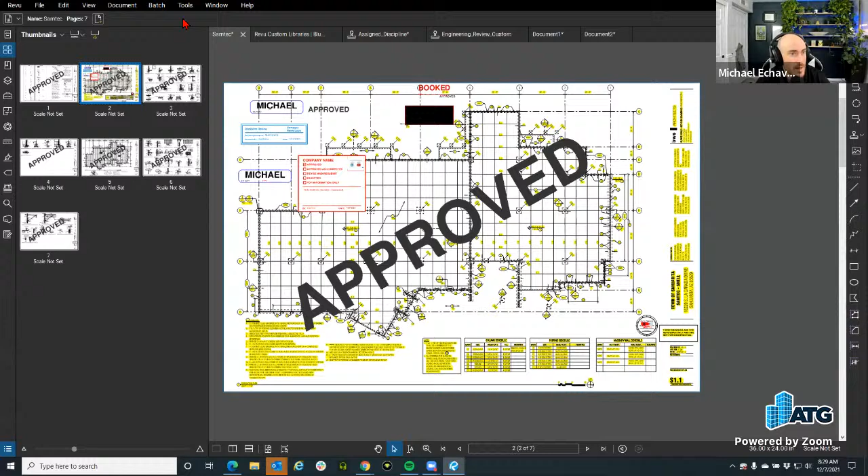Oh, a couple good questions before we wrap up here. One from Marvin: can stamps be added to tool sets? Absolutely. And then also we got one that's going to need a little bit of experimentation. You see that question from Brandon? Oh, so Brandon's saying that you can delete them. So I would test it. That is, you'd have to reselect. And I didn't think about that. It seems like kind of a hack. You just have to reselect the signature, so the signed document.

Right. I can't tell if you're reading or you froze up. I think you froze up. You're not blinking. You can remove a signature box or move it, and it allows you to select and edit the box. So did my voice catch up? Yeah, there you go. Now you're back. I'm here now.

Okay. So sounds like a little hack, which I was unaware of, but if you reselect it, you get back into it. So you can add new ones, I'm guessing, and still be in it. And can you move them though? It did it when I first selected it. So if I hit escape again, but I have a full version of Revu, so I can still come in and select these. I guess you could select this. Nope. You have to be in that first edition of it. And then there you go. So I don't know if this works for everyone that has non-eXtreme.

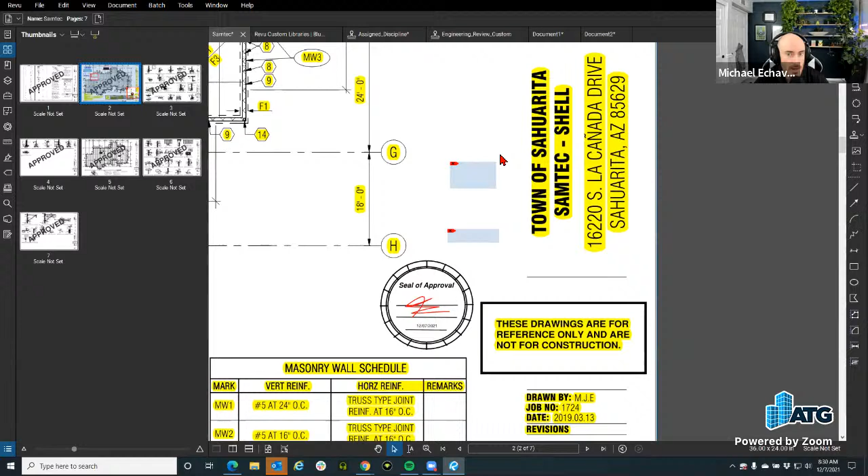Yeah, check it out. So does Control Z work to remove it? After you've placed it, yeah, but you'd have to Control Z out of everything that you've done too. Yeah, because see, it's still here. I'd have to go all the way back to the origin. Oh, he's talking about the signatures panel on the left side, which you do not have visible. But yeah, you have a signature there. It doesn't show up. Interesting. It's only, I think, if I log in. But you have the delete, but some don't have the signatures panel either, though. That's the thing, too, for versions. So be aware of that.